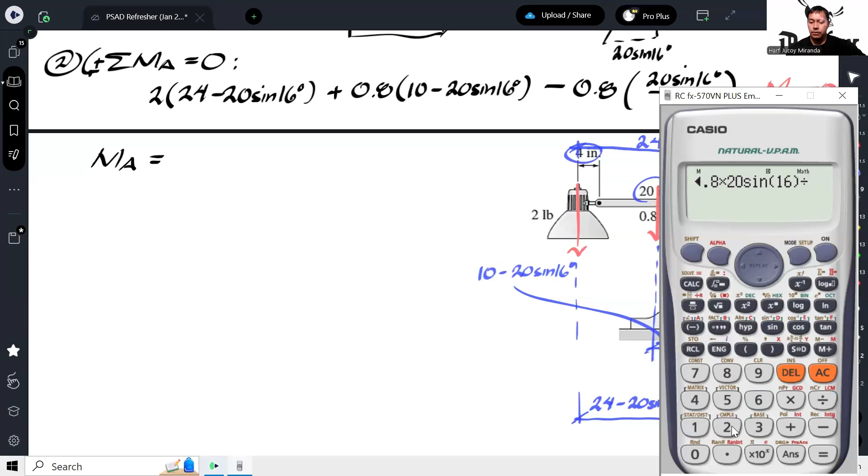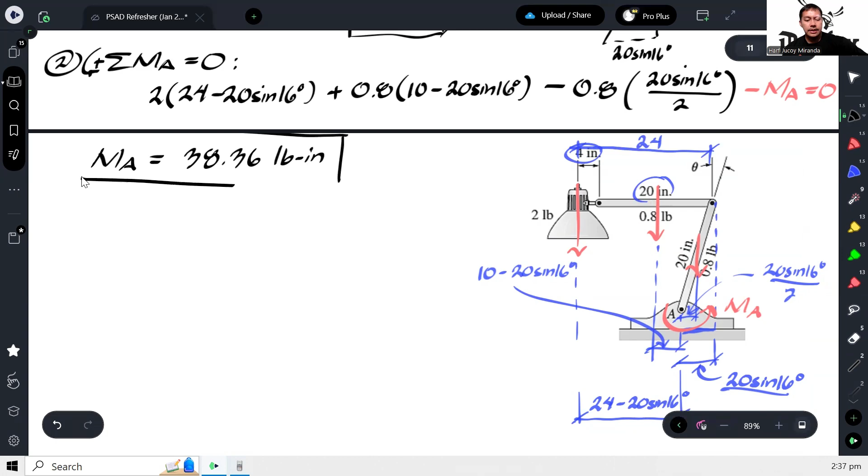So therefore, MA, or moment at A provided by friction, will be equal to 2(24 minus 20 sine 16) plus 0.8(10 minus 20 sine 16) minus 0.8 times 20 sine 16 over 2. So that gives us 38.36 pound-inch. So that is the moment to be provided by the friction at A.